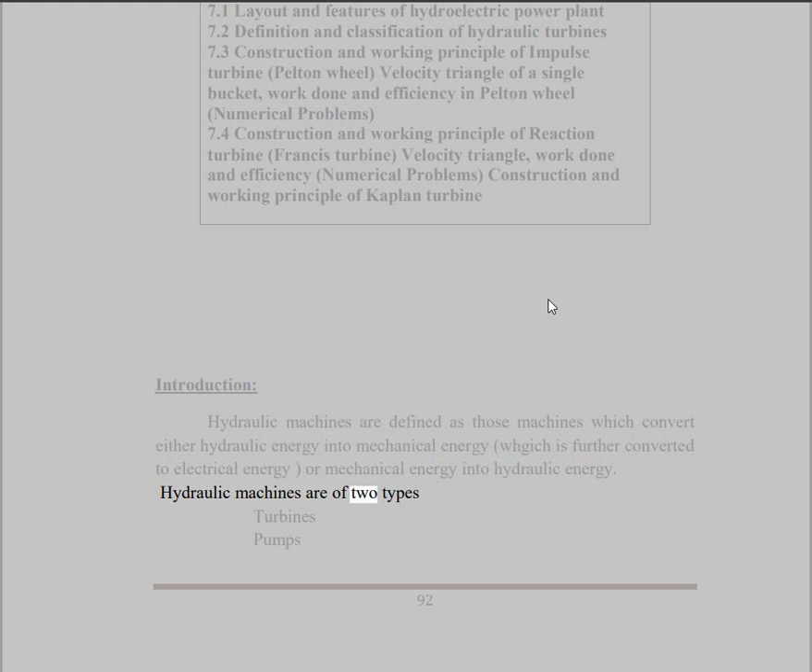Turbines are defined as the hydraulic machines which convert hydraulic energy into mechanical energy. This mechanical energy is used in running an electric generator, which is directly coupled to the shaft of the turbine. Thus mechanical energy is converted into electrical energy. The electrical power, which is obtained from the hydraulic energy, is known as hydroelectric power.

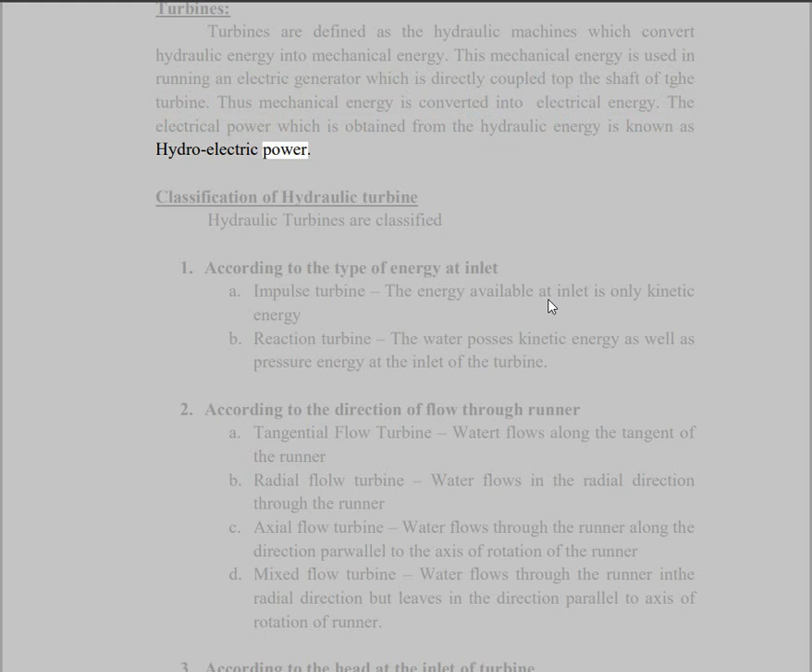Classification of hydraulic turbine. Hydraulic turbines are classified according to the type of energy at inlet: A. Impulse turbine - the energy available at inlet is only kinetic energy. B. Reaction turbine - the water possesses kinetic energy as well as pressure energy at the inlet of the turbine.

According to the direction of flow through runner: A. Tangential flow turbine - water flows along the tangent of the runner. B. Radial flow turbine - water flows in the radial direction through the runner. C. Axial flow turbine - water flows through the runner along the direction parallel to the axis of rotation of the runner. D. Mixed flow turbine - water flows through the runner in the radial direction, but leaves in the direction parallel to the axis of rotation of the runner. According to the head at the inlet of turbine.

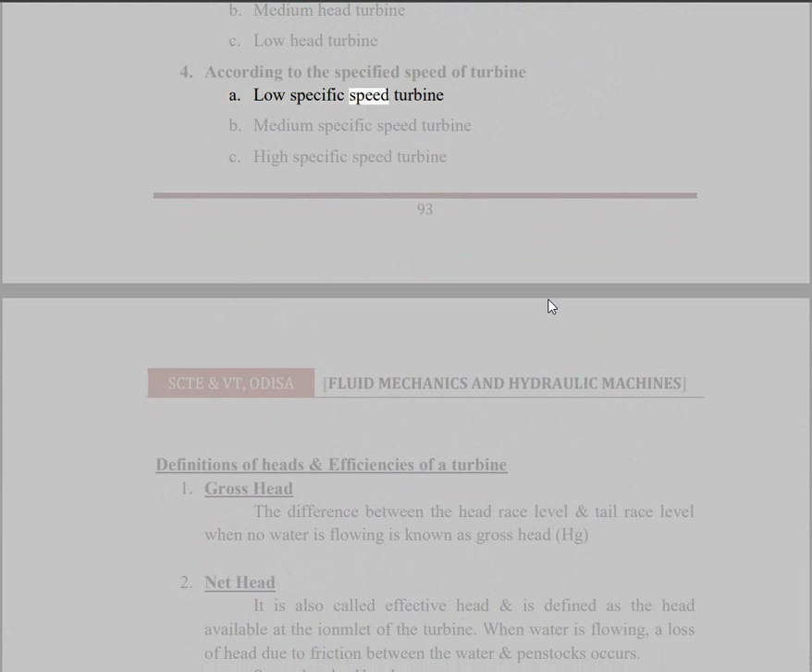A. High head turbine. B. Medium head turbine. C. Low head turbine. According to the specific speed of turbine: A. Low specific speed turbine. B. Medium specific speed turbine. C. High specific speed turbine.

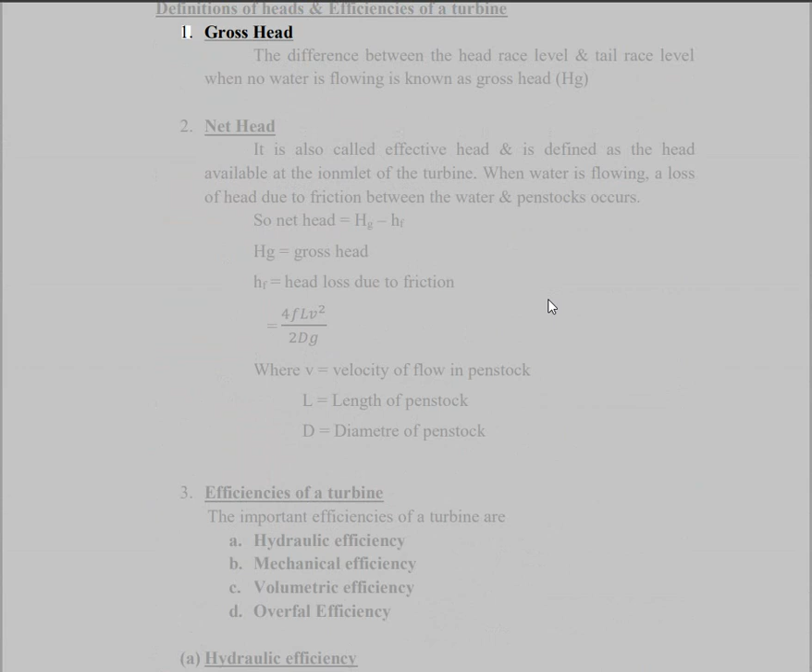Definitions of heads and efficiencies of a turbine. Gross head: the difference between the head race level and tail race level when no water is flowing is known as gross head, Hg.

Net head is also called effective head, and is defined as the head available at the inlet of the turbine. When water is flowing, a loss of head due to friction between the water and penstocks occurs. So net head equals Hg minus Hf, where Hg equals gross head and Hf equals head loss due to friction, with V equals velocity of flow in penstock, L equals length of penstock, D equals diameter of penstock.

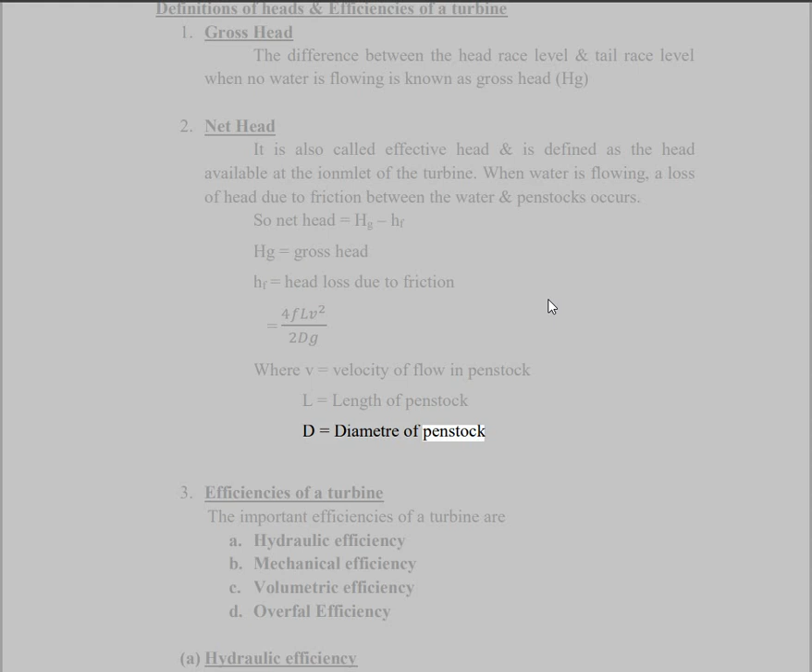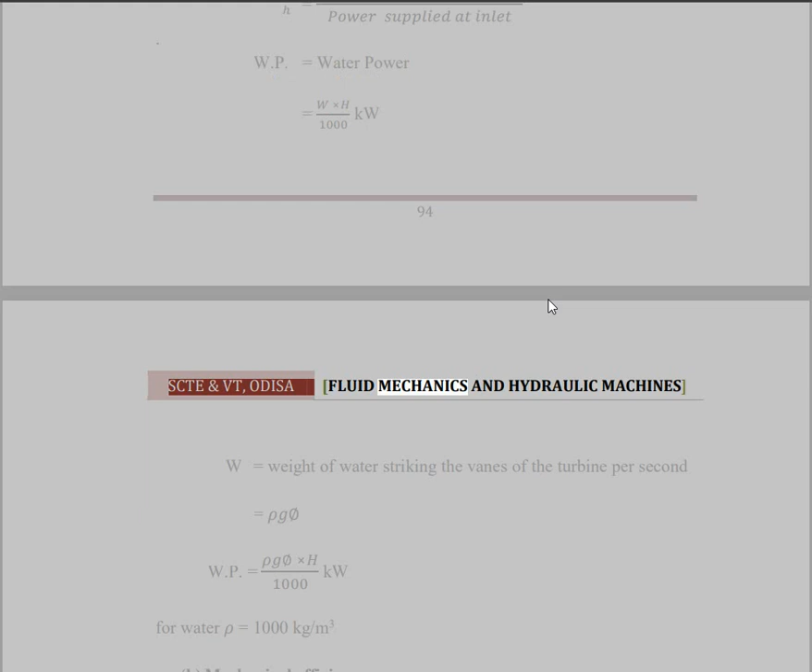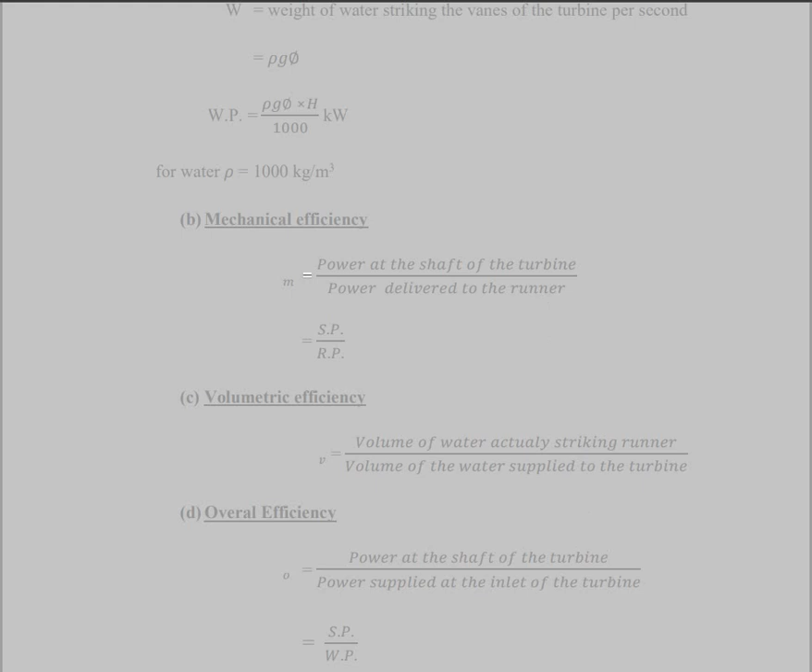The Pelton wheel or Pelton turbine is a tangential flow impulse turbine. The water strikes the runner along the tangent of the runner. The energy available at the inlet of the turbine is only kinetic energy. The pressure at the inlet and outlet of the turbine is atmospheric. This turbine is used for high heads.

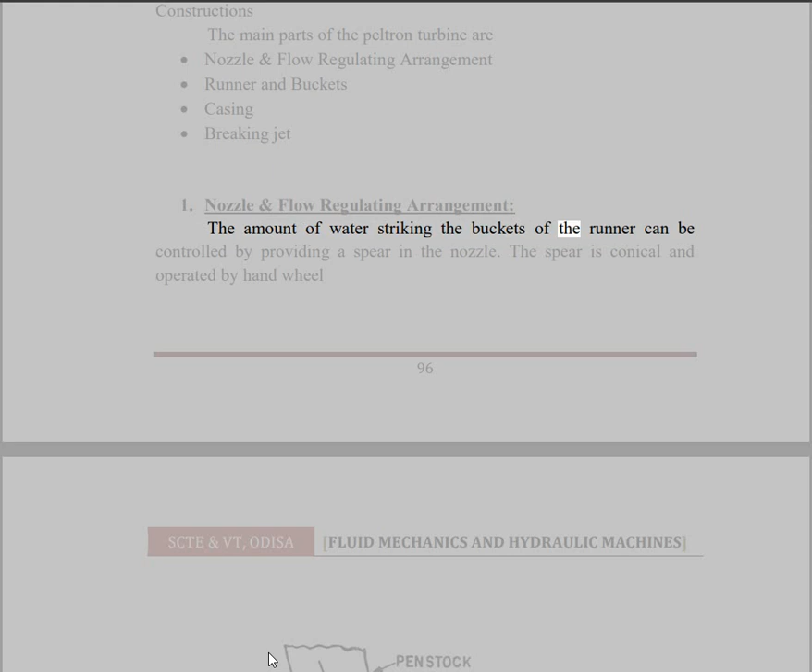Construction. The main parts of the Pelton turbine are: nozzle and flow regulating arrangement, runner and buckets, casing, and braking jet. Nozzle and flow regulating arrangement: the amount of water striking the buckets of the runner can be controlled by providing a spear in the nozzle. The spear is conical and operated by a hand wheel.

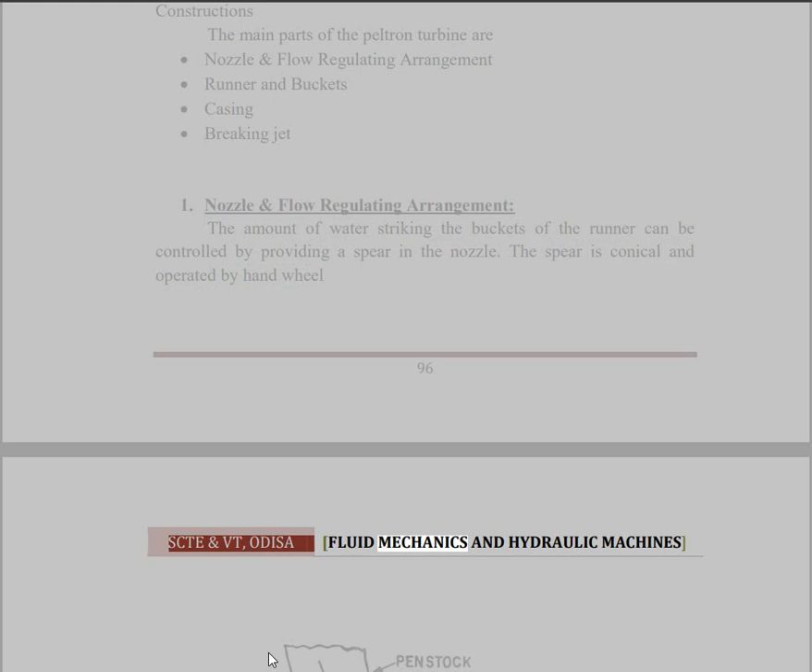When the spear is pushed forward, the amount of water striking is reduced, and when the spear is pushed back, the amount of water striking the runner is increased.

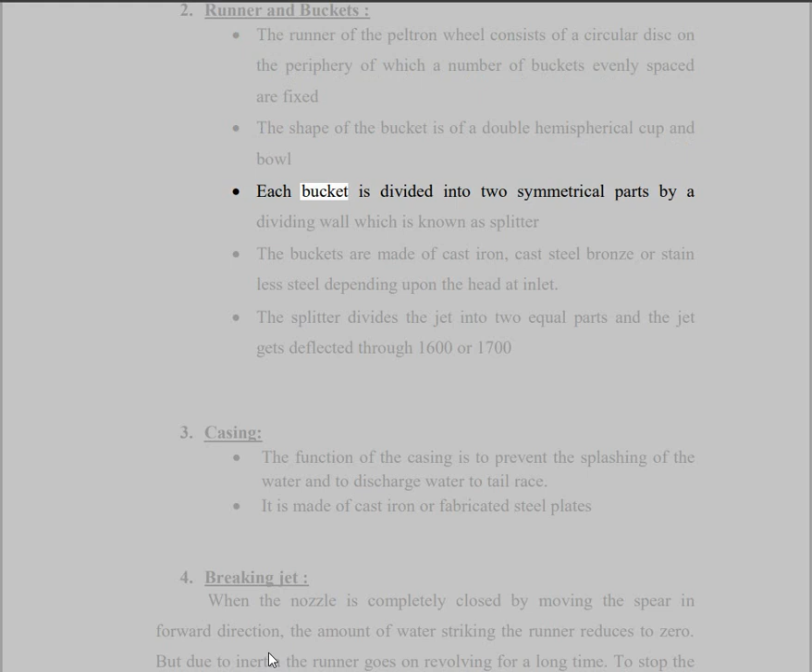Runner and buckets. The runner of the Pelton wheel consists of a circular disc on the periphery of which a number of buckets evenly spaced are fixed. The shape of the bucket is of a double hemispherical cup and bowl. Each bucket is divided into two symmetrical parts by a dividing wall known as a splitter. The buckets are made of cast iron, cast steel, bronze, or stainless steel depending upon the head at inlet. The splitter divides the jet into two equal parts, and the jet gets deflected through 160 or 170 degrees.

Casing. The function of the casing is to prevent the splashing of the water and to discharge water to the tail race. It is made of cast iron or fabricated steel plates.

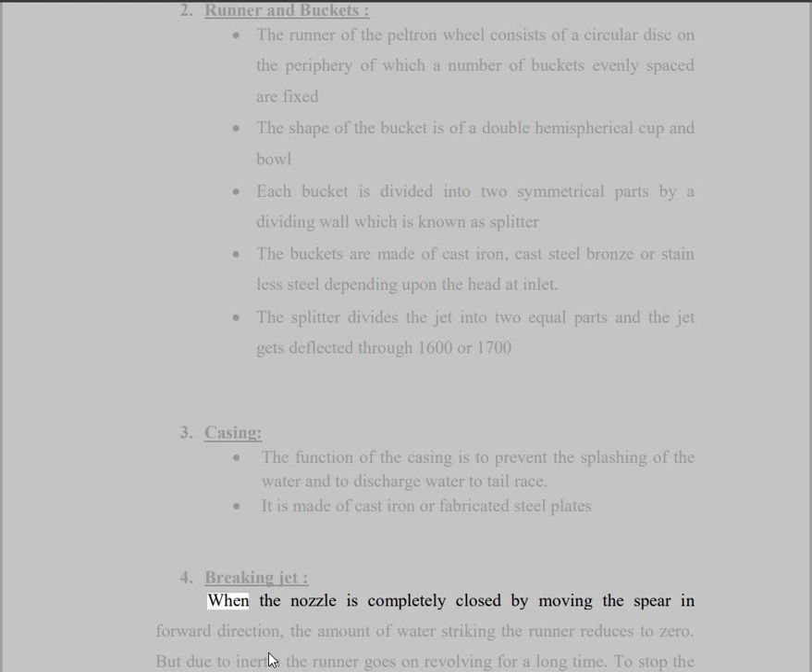Braking jet. When the nozzle is completely closed by moving the spear in the forward direction, the amount of water striking the runner reduces to zero. But due to inertia, the runner goes on revolving for a long time. To stop the runner in short time, a small nozzle is provided which directs the jet of water on the back of the vanes. This jet is called the braking jet.

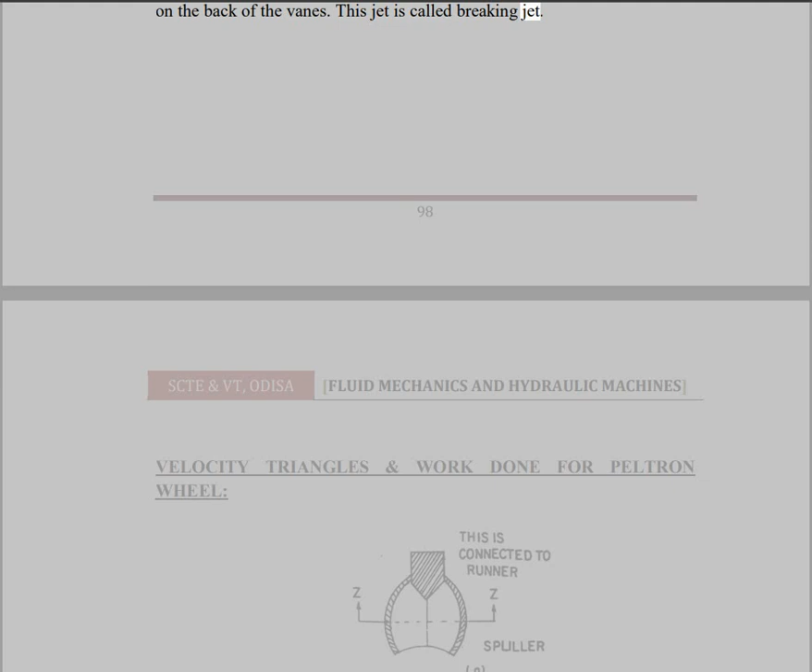Velocity triangles and work done for Pelton wheel. The jet of water strikes the bucket at the splitter.

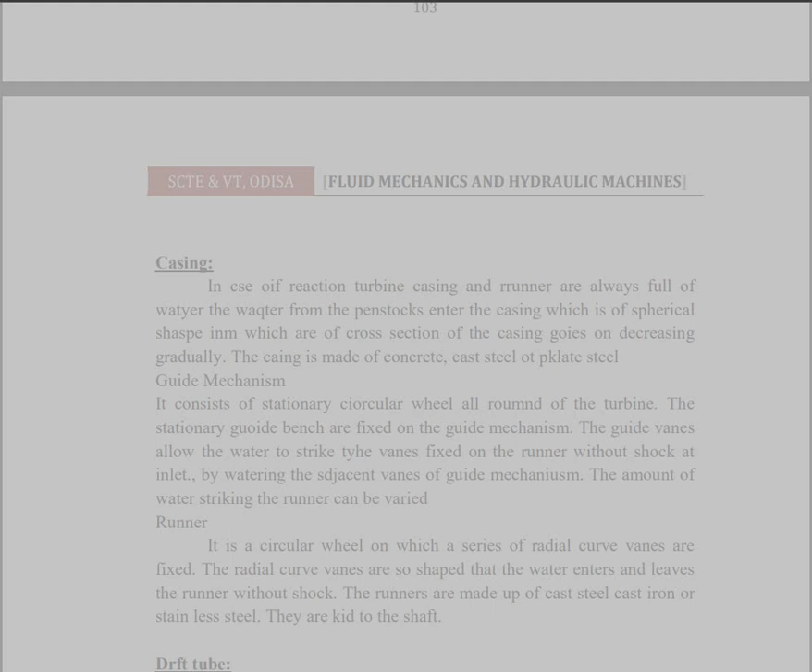Francis Turbine is an inward flow reaction turbine, having radial discharge at outlet. Radial flow reaction turbine: radial flow turbines are those turbines in which the water flows in the radial direction. The water may flow radially from outward to inward or from inward to outward. Reaction turbines means that the water at the inlet of the turbine possesses kinetic energy as well as pressure energy.

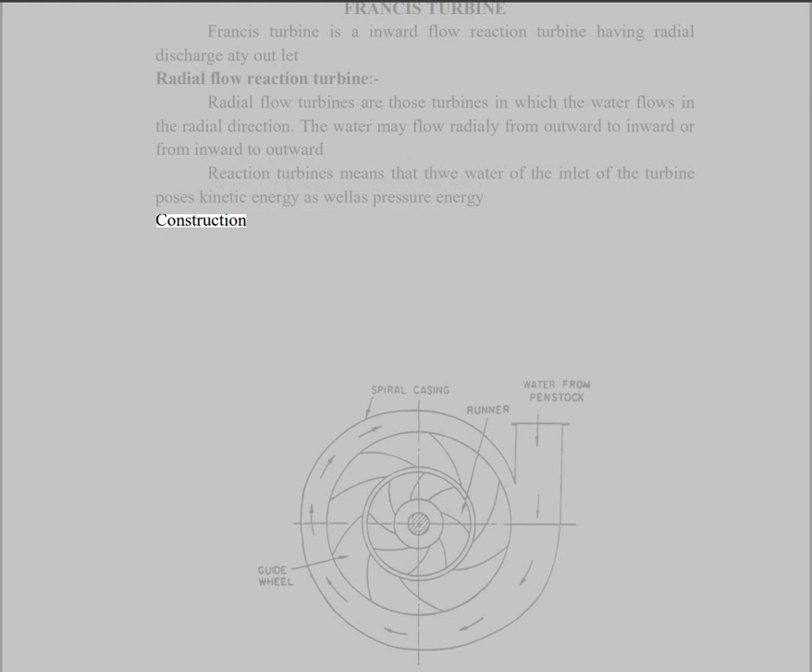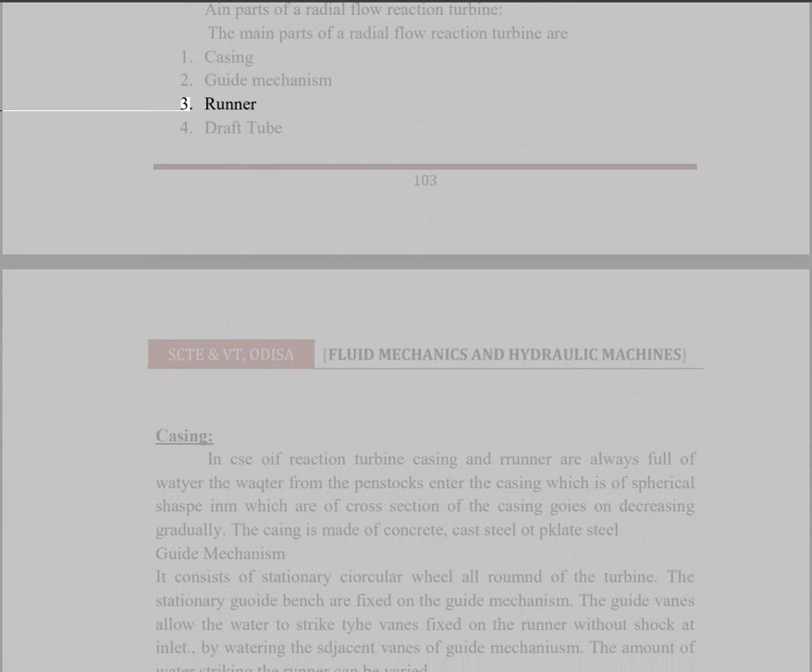Construction and parts of a radial flow reaction turbine. The main parts of a radial flow reaction turbine are: 1. Casing, 2. Guide mechanism, 3. Runner, 4. Draft tube.

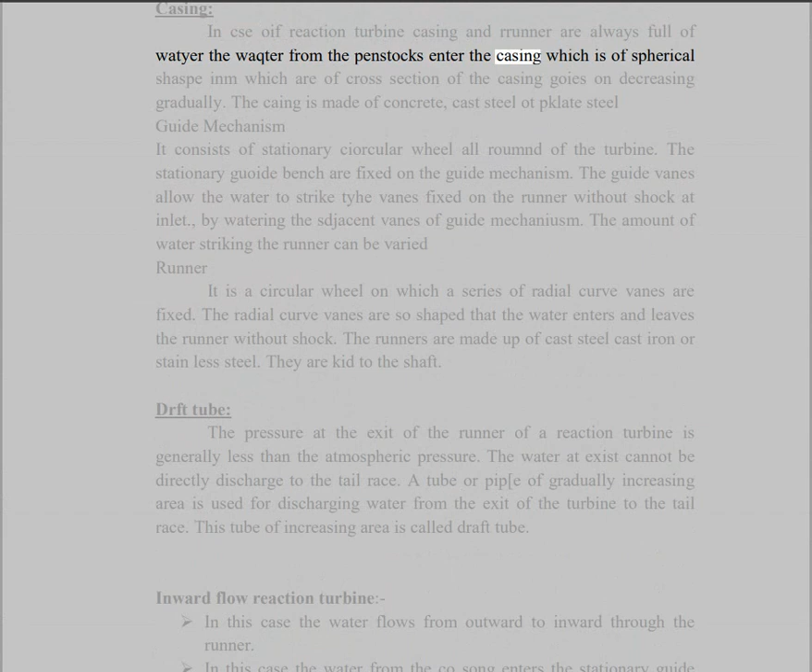Casing. In case of reaction turbine, casing and runner are always full of water. The water from the penstock enters the casing, which is of spiral shape in which the area of cross-section of the casing goes on decreasing gradually. The casing is made of concrete, cast steel, or plate steel.

Guide mechanism. It consists of a stationary circular wheel all around the turbine. The stationary guide vanes are fixed on the guide mechanism. The guide vanes allow the water to strike the vanes fixed on the runner without shock at inlet by varying the adjacent vanes of the guide mechanism. The amount of water striking the runner can be varied.

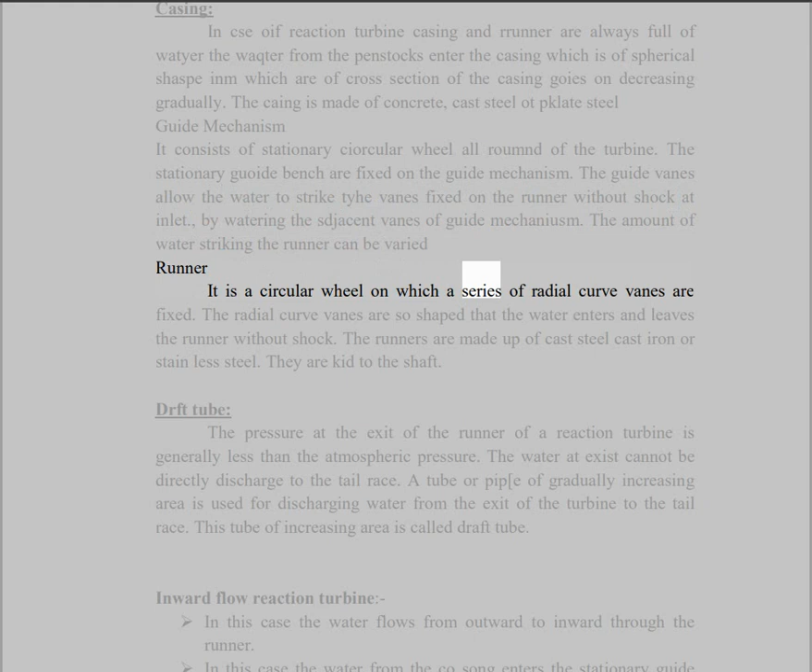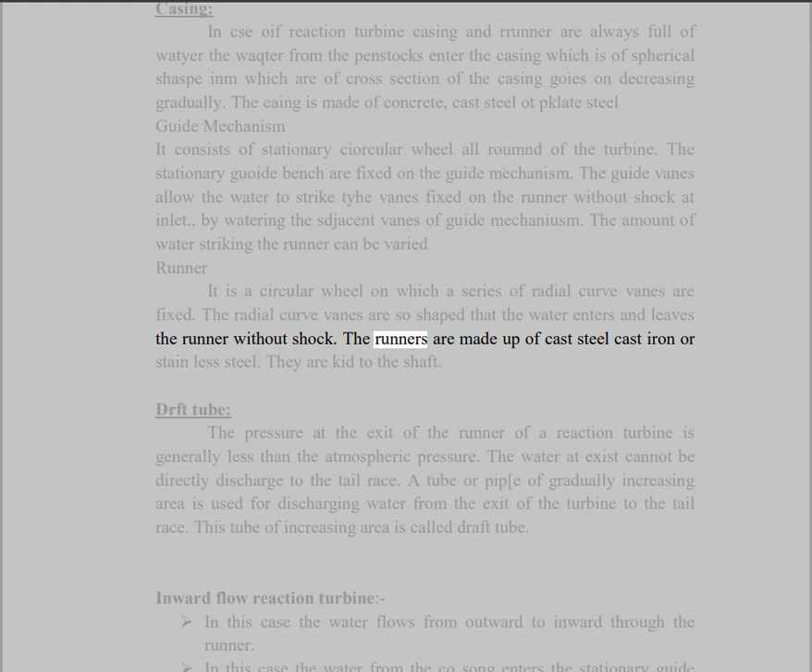Runner. It is a circular wheel on which a series of radial curved vanes are fixed. The radial curved vanes are so shaped that the water enters and leaves the runner without shock. The runners are made up of cast steel, cast iron, or stainless steel. They are keyed to the shaft.

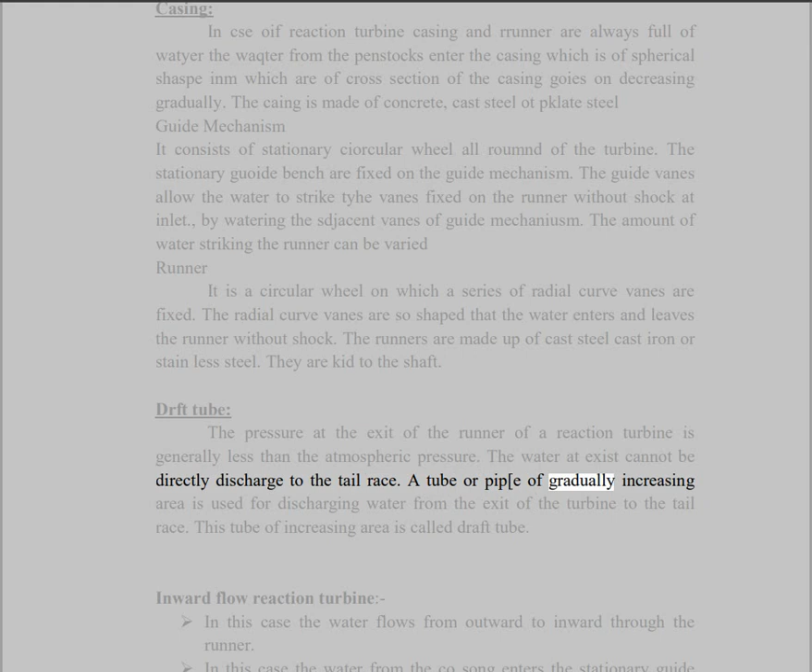Draft tube. The pressure at the exit of the runner of a reaction turbine is generally less than the atmospheric pressure. The water at exit cannot be directly discharged to the tail race. A tube or pipe of gradually increasing area is used for discharging water from the exit of the turbine to the tail race. This tube of increasing area is called the draft tube.

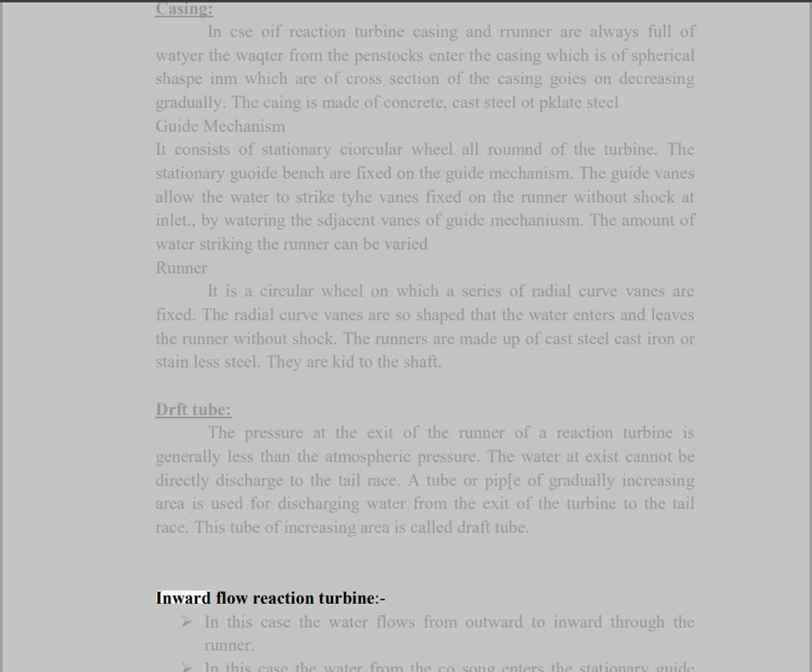Inward flow reaction turbine. In this case, the water flows from outward to inward through the runner. The water from the casing enters the stationary guide wheel. The guide wheel consists of guide vanes which direct the water to enter the runner, which consists of moving vanes.

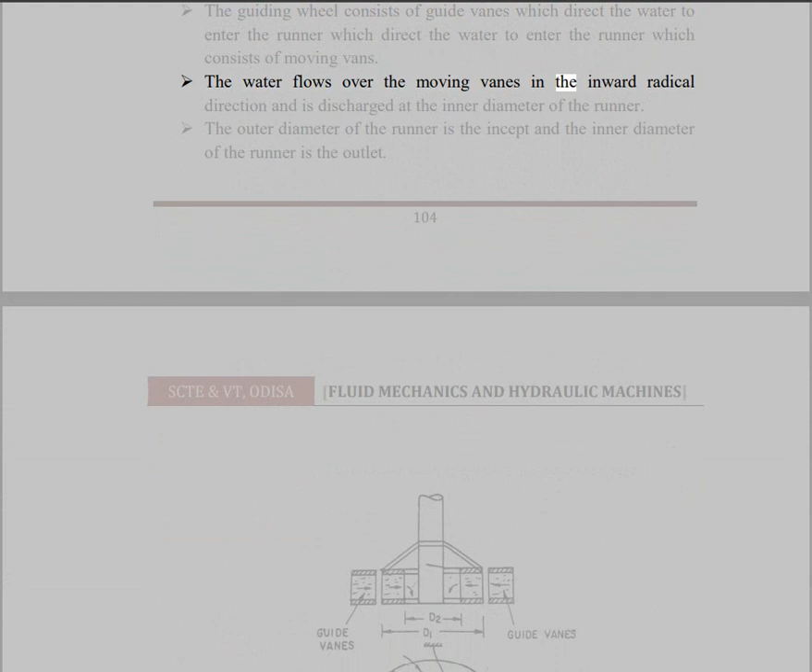The water flows over the moving vanes in the inward radial direction and is discharged at the inner diameter of the runner. The outer diameter of the runner is the inlet, and the inner diameter of the runner is the outlet.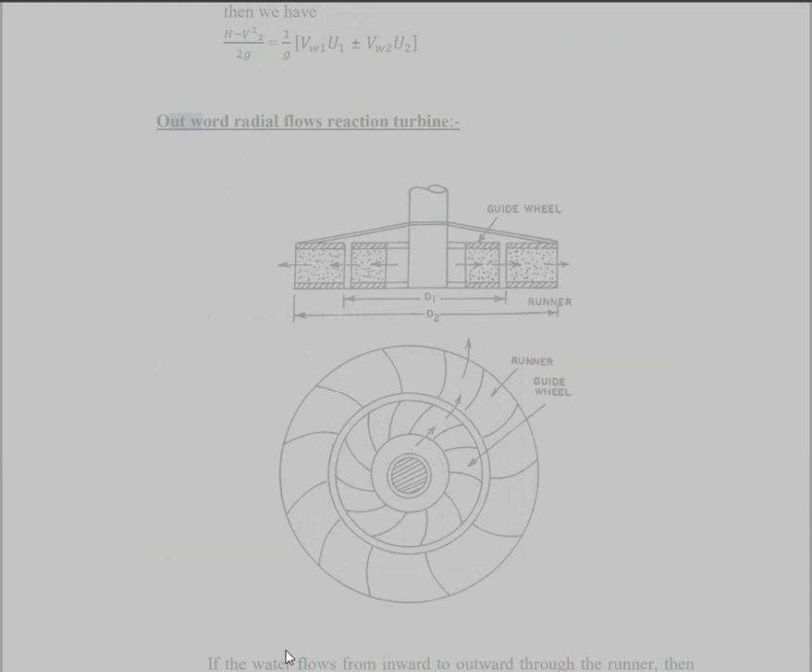If the water flows from inward to outward through the runner, then that turbine is known as outward flow reaction turbine. In this case, the inlet of the runner is at the inner diameter of the runner, so the tangential velocity at inlet will be less than that at outlet. With U1, U2 as D1, D2, the velocity triangles at inlet and outlet, the work done by water on the runner per second, the horsepower developed, and the hydraulic efficiency are similar to the inward flow reaction turbine.

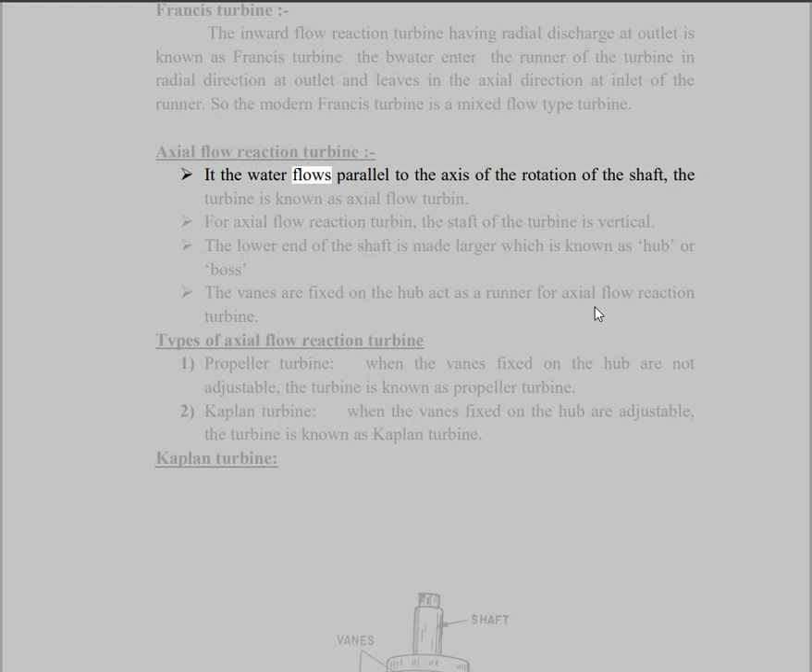Axial flow reaction turbine. If the water flows parallel to the axis of rotation of the shaft, the turbine is known as axial flow turbine. For axial flow reaction turbine, the shaft of the turbine is vertical. The lower end of the shaft is made larger, which is known as hub or boss. The vanes are fixed on the hub and act as a runner for axial flow reaction turbine.

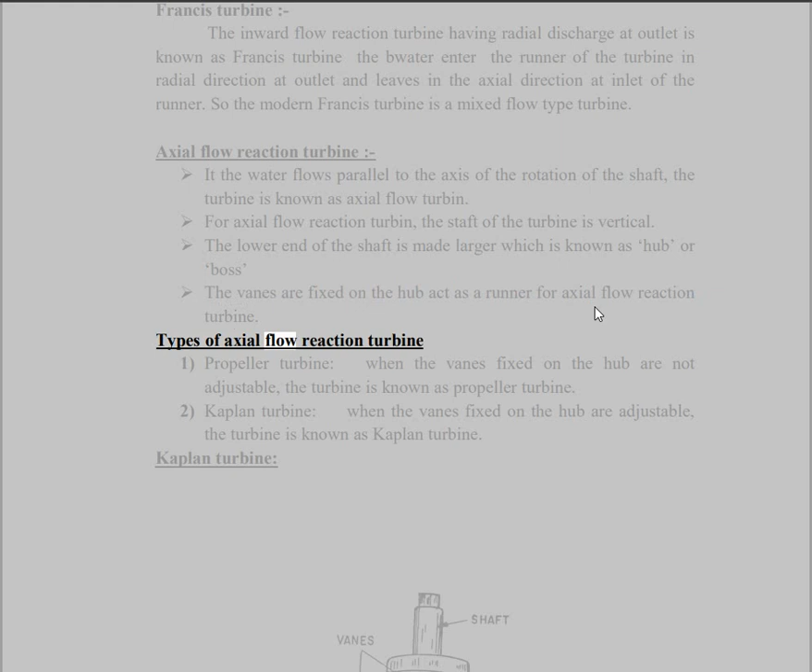Types of axial flow reaction turbine: 1. Propeller turbine - when the vanes fixed on the hub are not adjustable, the turbine is known as propeller turbine. 2. Kaplan turbine - when the vanes fixed on the hub are adjustable, the turbine is known as Kaplan turbine.

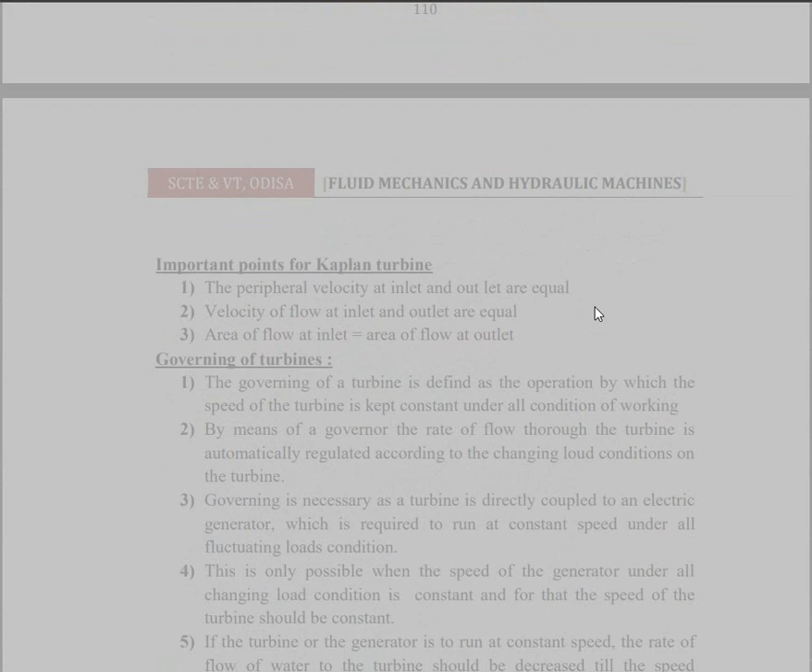When the vanes fixed on the hub are adjustable, the turbine is known as a Kaplan turbine. This turbine is suitable where a larger quantity of water is available at low head. The Kaplan turbine consists of a hub fixed to the shaft, on which the adjustable vanes are fixed.

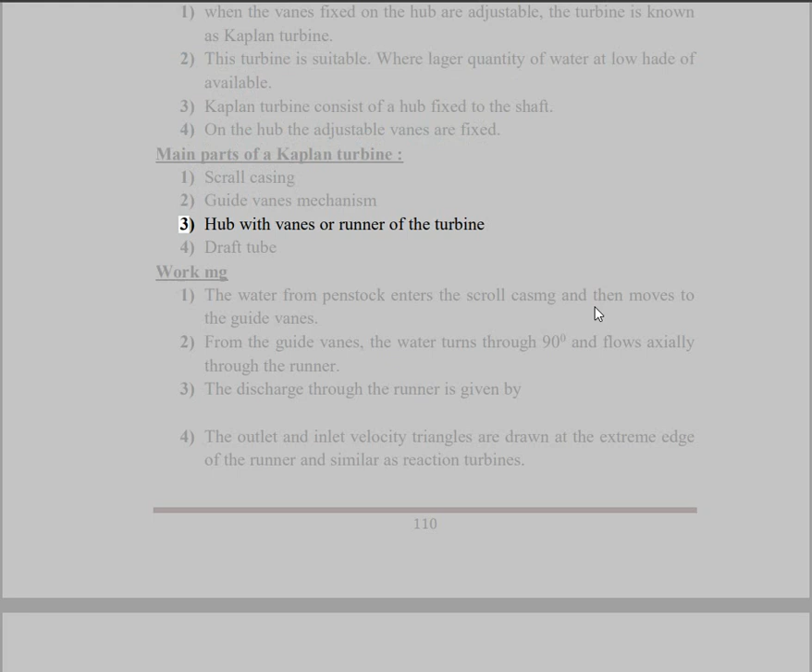Main parts of a Kaplan turbine: 1. Scroll casing. 2. Guide vanes mechanism. 3. Hub with vanes, or runner of the turbine. 4. Draft tube.

The water from the penstock enters the scroll casing and then moves to the guide vanes. From the guide vanes, the water turns through 90 degrees and flows axially through the runner. The discharge through the runner is given by a formula. The outlet and inlet velocity triangles are drawn at the extreme edge of the runner, similar to reaction turbines.

Important points for Kaplan turbine: 1. The peripheral velocity at inlet and outlet are equal. 2. Velocity of flow at inlet and outlet are equal. 3. Area of flow at inlet equals area of flow at outlet.

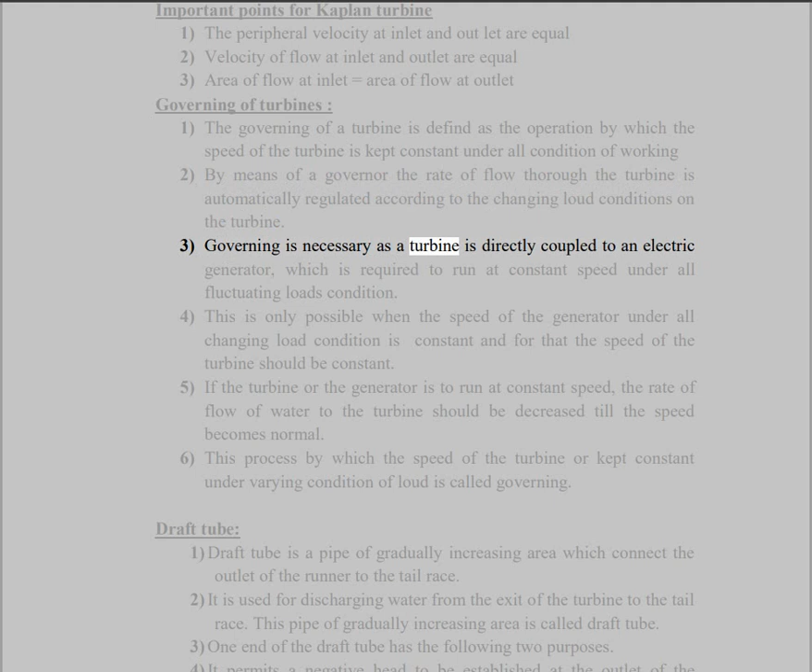Governing of turbines: The governing of a turbine is defined as the operation by which the speed of the turbine is kept constant under all conditions of working. By means of a governor, the rate of flow through the turbine is automatically regulated according to the changing load conditions on the turbine. Governing is necessary as a turbine is directly coupled to an electric generator, which is required to run at constant speed under all fluctuating load conditions. This is only possible when the speed of the generator under all changing load conditions is constant, and for that the speed of the turbine should be constant.

If the turbine or the generator is to run at constant speed, the rate of flow of water to the turbine should be decreased till the speed becomes normal. This process, by which the speed of the turbine is kept constant under varying conditions of load, is called governing.

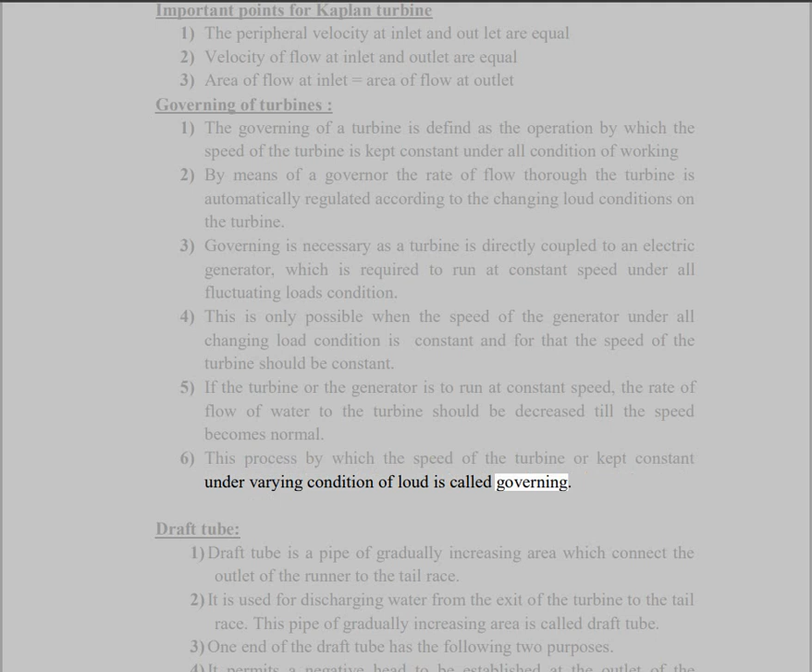Draft tube: The draft tube is a pipe of gradually increasing area which connects the outlet of the runner to the tail race. It is used for discharging water from the exit of the turbine to the tail race. This pipe of gradually increasing area is called the draft tube.

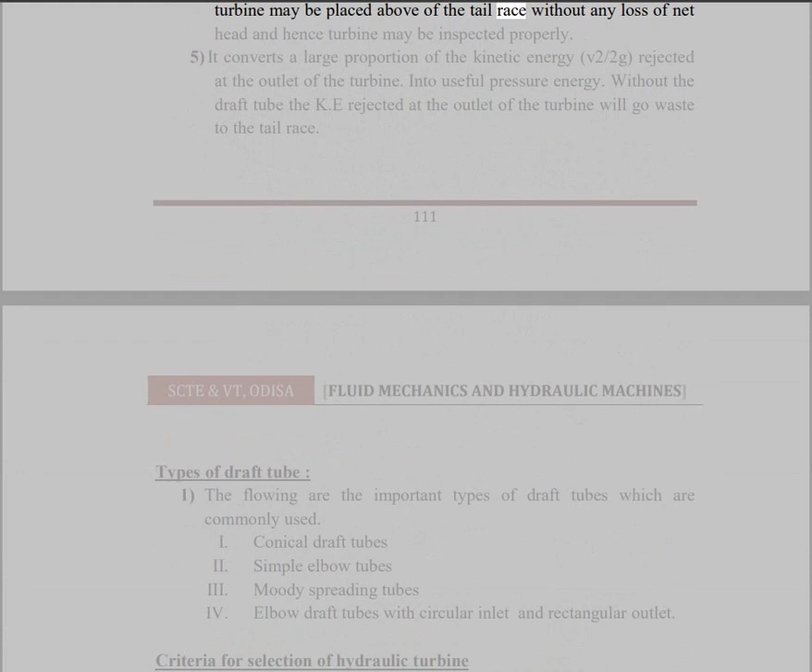One end of the draft tube serves two purposes. It permits a negative head to be established at the outlet of the runner, thereby increasing the net head on the turbine. The turbine may be placed above the tail race without any loss of net head, and hence the turbine may be inspected properly.

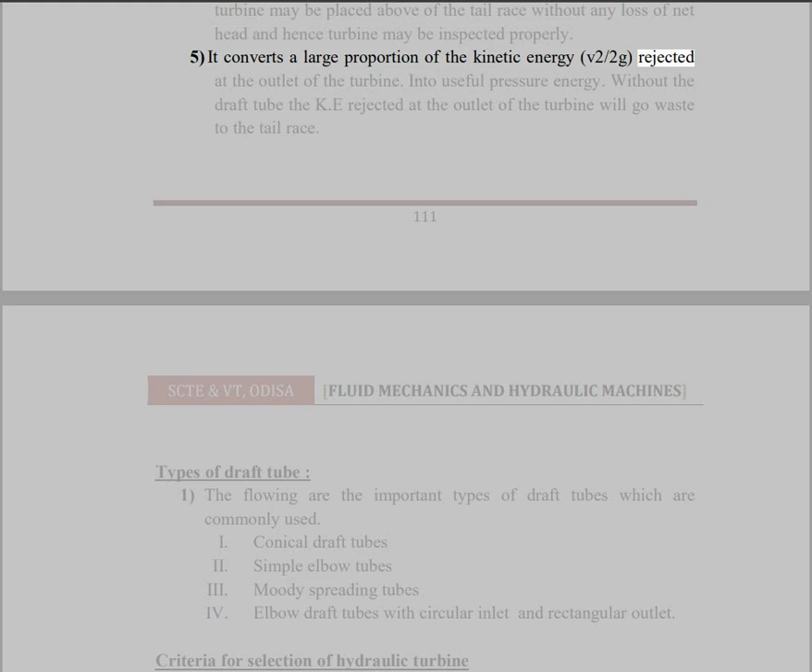It converts a large proportion of the kinetic energy, V squared over 2G, rejected at the outlet of the turbine, into useful pressure energy. Without the draft tube, the kinetic energy rejected at the outlet of the turbine would go waste to the tail race.

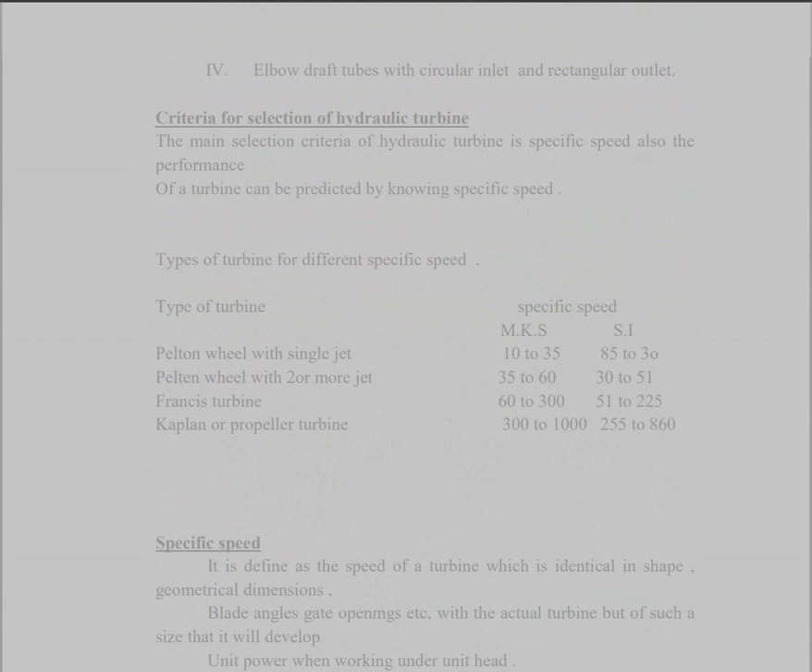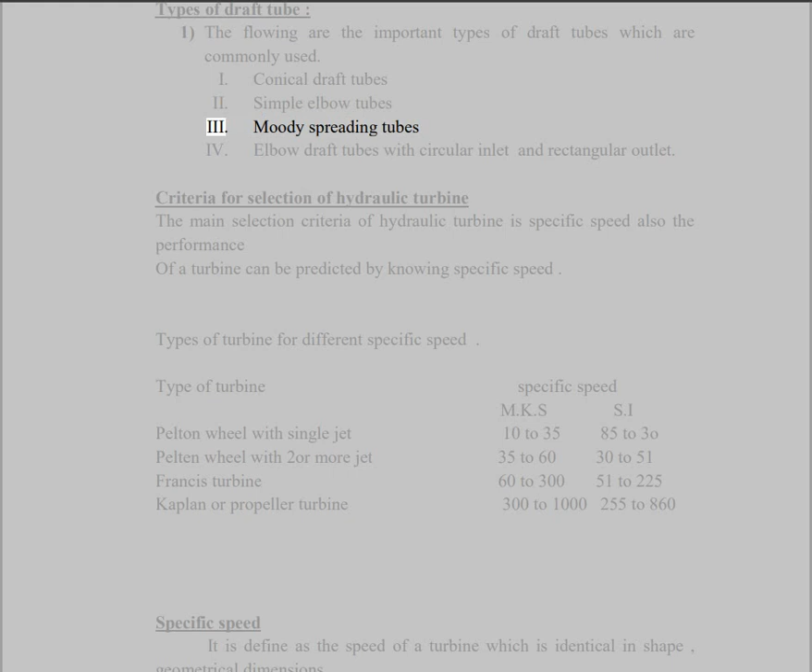Types of draft tube: The following are the important types of draft tubes which are commonly used: 1. Conical draft tubes. 2. Simple elbow tubes. 3. Moody spreading tubes. 4. Elbow draft tubes with circular inlet and rectangular outlet.

Criteria for selection of hydraulic turbine: The main selection criteria of hydraulic turbine is specific speed. Also, the performance of a turbine can be predicted by knowing specific speed.

Types of turbine for different specific speeds: Pelton wheel with single jet, 10 to 35 specific speed. Pelton wheel with 2 or more jets, 35 to 60. Francis turbine, 60 to 300. Kaplan or propeller turbine, 300 to 1000.

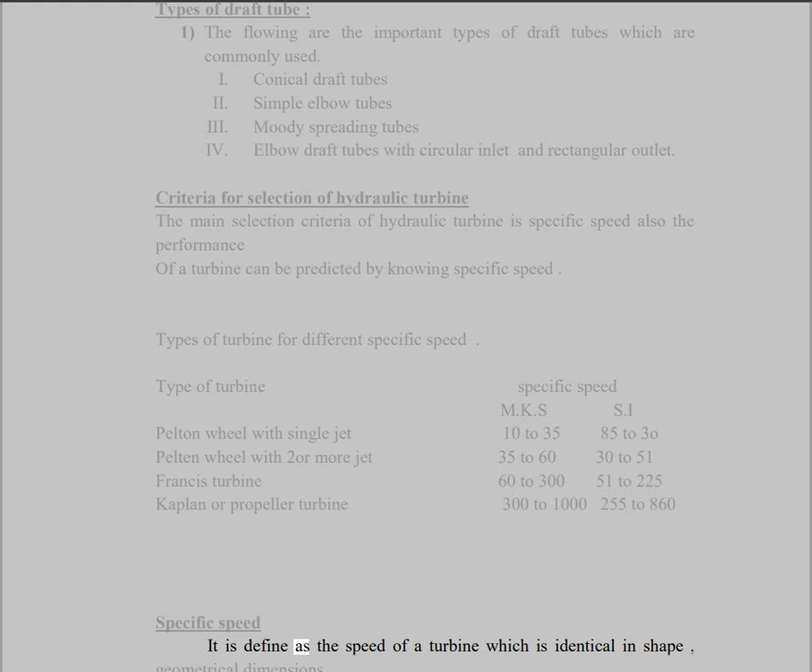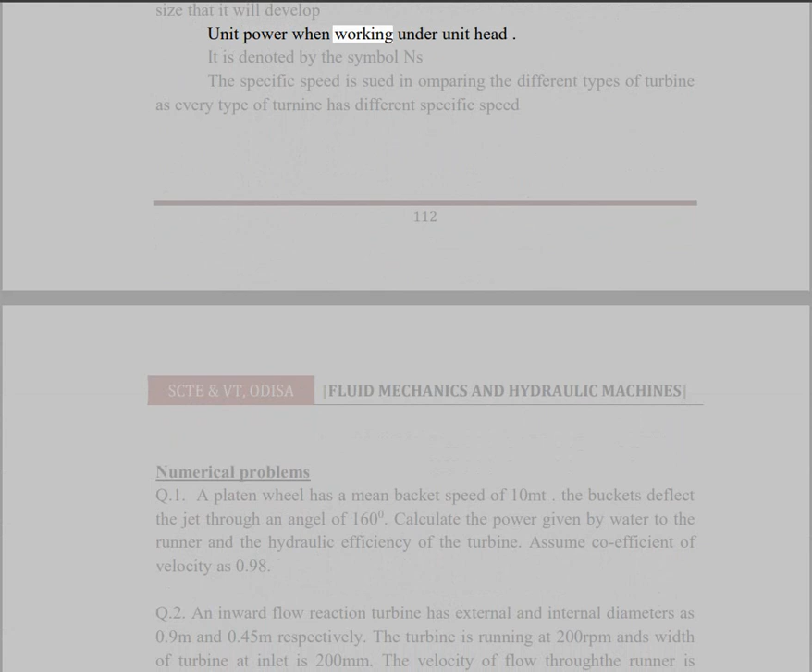Specific speed is defined as the speed of a turbine which is identical in shape, geometrical dimensions, blade angles, gate openings, etc., with the actual turbine, but of such a size that it will develop unit power when working under unit head. It is denoted by the symbol NS. The specific speed is used in comparing different types of turbines, as every type of turbine has a different specific speed.

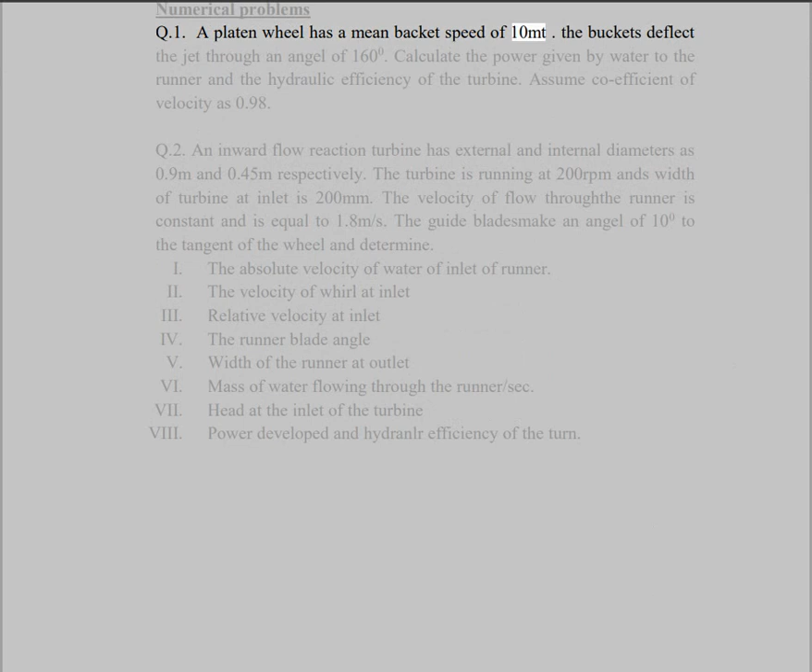Definition and classification of pumps. Centrifugal pumps: construction and working principles, velocity diagram of a single impeller, work done, and efficiency. Numerical problems. Concept of multistage centrifugal pumps. Cavitation: causes and its effects. Reciprocating pumps: construction and working principle of single-acting and double-acting reciprocating pumps. Concept of slip and negative slip.

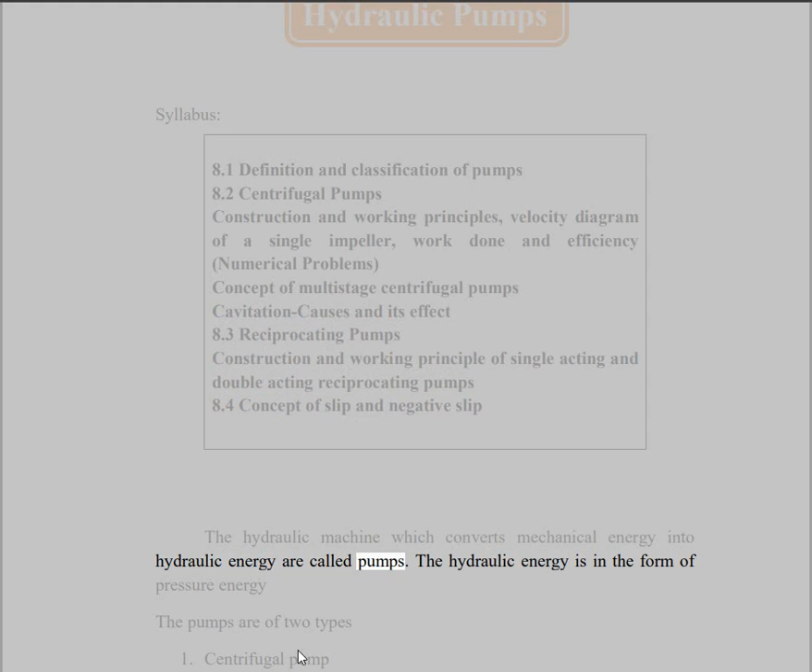The hydraulic machine which converts mechanical energy into hydraulic energy is called a pump. The hydraulic energy is in the form of pressure energy. Pumps are of two types: 1. Centrifugal pump. 2. Reciprocating pump.

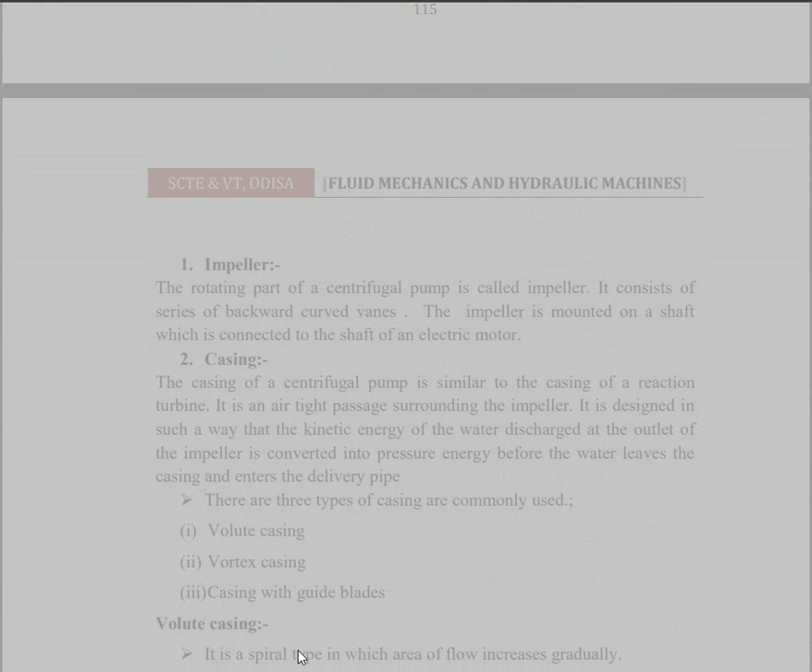Centrifugal pump: the hydraulic machine which converts mechanical energy into pressure energy by means of centrifugal force acting on the fluid is known as a centrifugal pump. The centrifugal pump acts as the reverse of an inward radial flow reaction turbine.

The centrifugal pump works on the principle of forced vortex flow, which means that when a certain mass of liquid is rotated by an external torque, a rise in pressure head of the rotating liquid takes place. The rise in pressure head at any point is proportional to the square of the tangential velocity of the liquid at that point, i.e. V^2/2g or W^2R^2/2g.

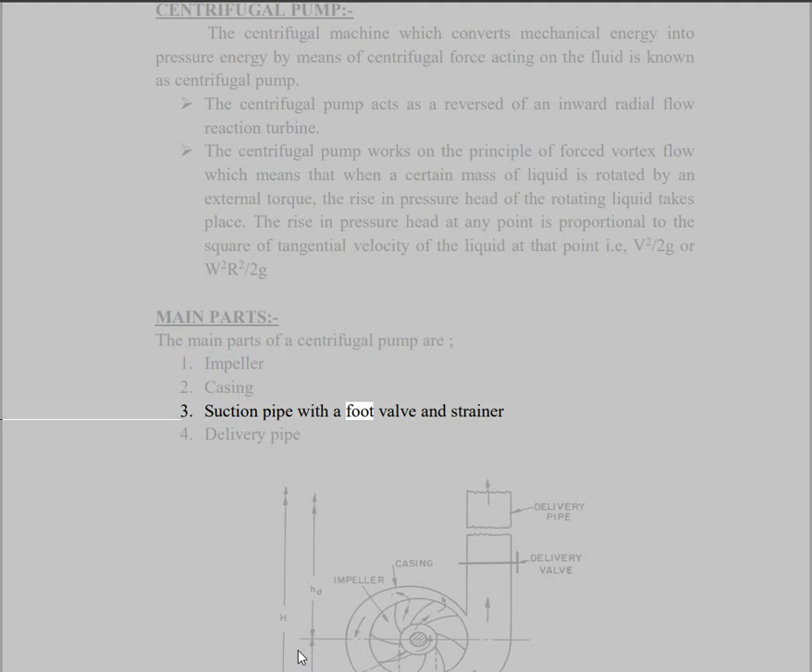Main parts. The main parts of a centrifugal pump are: 1. Impeller. 2. Casing. 3. Suction pipe with a foot valve and strainer. 4. Delivery pipe.

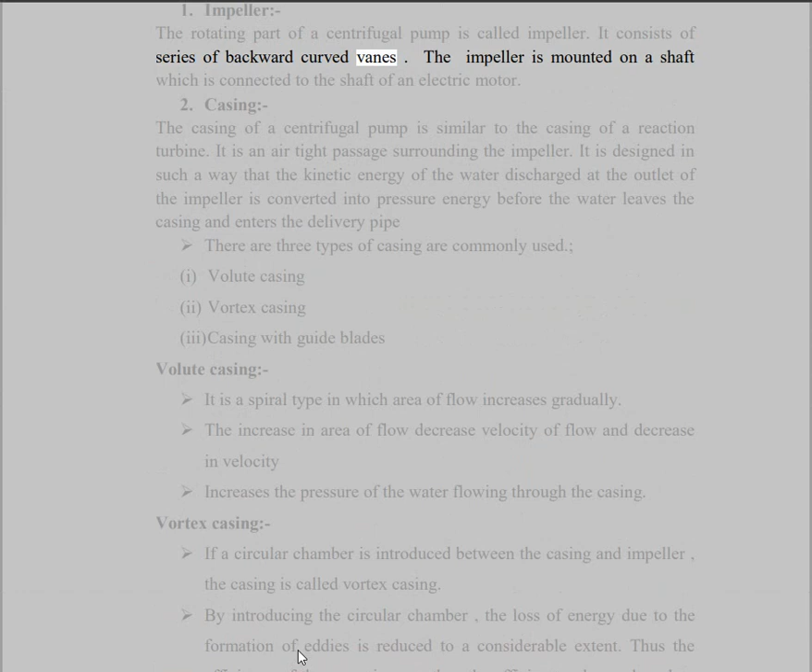1. Impeller. The rotating part of a centrifugal pump is called the impeller. It consists of a series of backward curved vanes. The impeller is mounted on a shaft which is connected to the shaft of an electric motor.

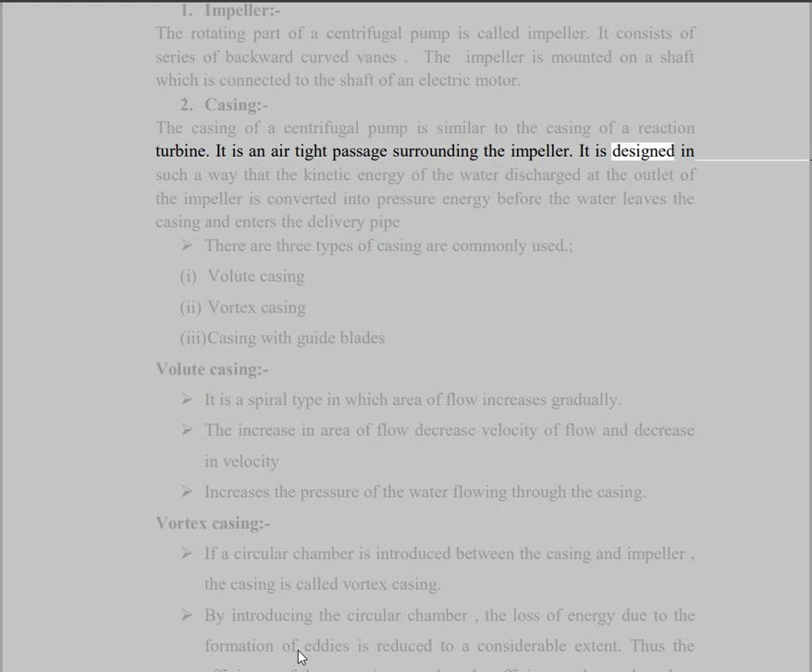2. Casing. The casing of a centrifugal pump is similar to the casing of a reaction turbine. It is an airtight passage surrounding the impeller. It is designed in such a way that the kinetic energy of the water discharged at the outlet of the impeller is converted into pressure energy before the water leaves the casing and enters the delivery pipe. There are 3 types of casing commonly used: 1. Volute casing. 2. Vortex casing. 3. Casing with guide blades.

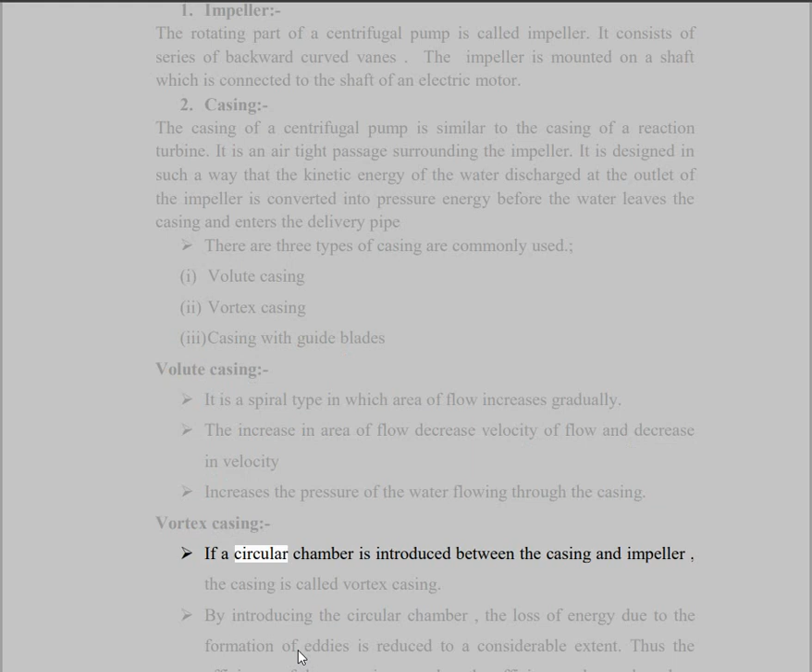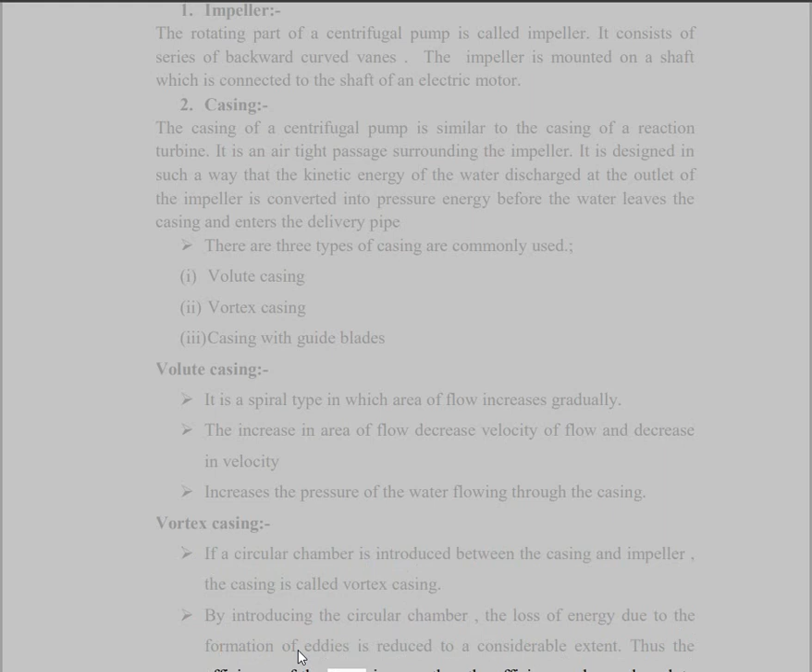Volute casing is a spiral type in which the area of flow increases gradually. The increase in area of flow decreases the velocity of flow, and the decrease in velocity increases the pressure of the water flowing through the casing. Vortex casing: if a circular chamber is introduced between the casing and impeller, the casing is called vortex casing. By introducing the circular chamber, the loss of energy due to the formation of eddies is reduced to a considerable extent. Thus the efficiency of the pump is more than when only volute casing is provided.

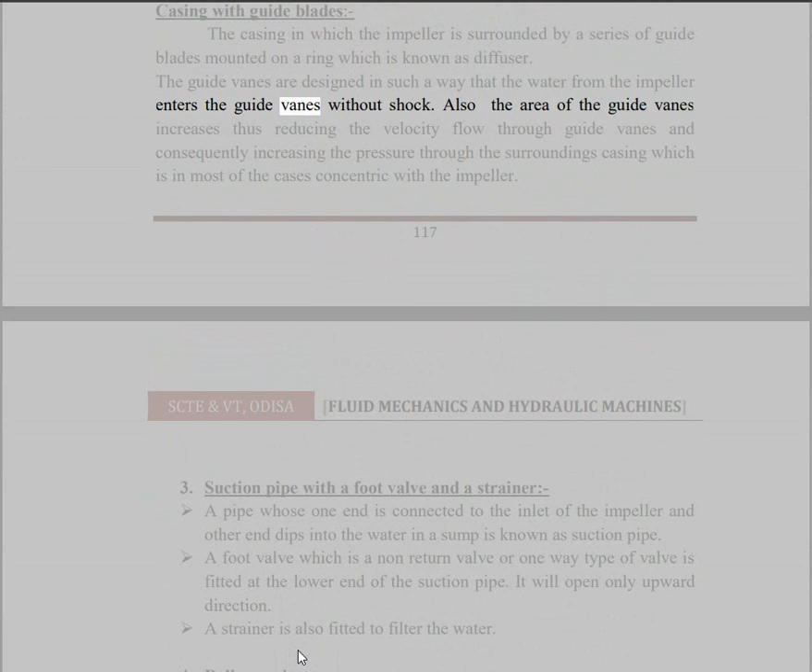Casing with guide blades: the casing in which the impeller is surrounded by a series of guide blades mounted on a ring is known as a diffuser. The guide vanes are designed such that water from the impeller enters the guide vanes without shock. Also, the area of the guide vanes increases, reducing the velocity of flow through the guide vanes and consequently increasing the pressure through the surrounding casing, which in most cases is concentric with the impeller.

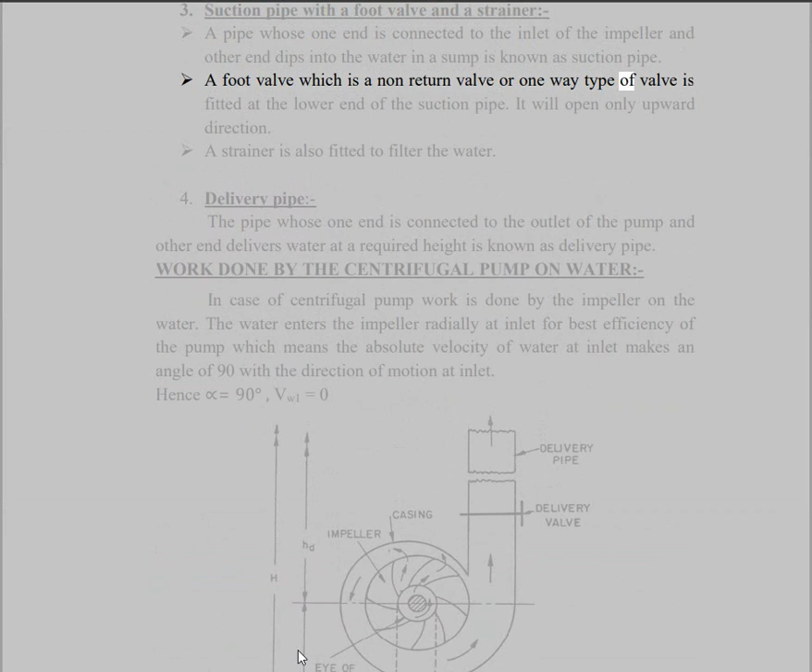3. Suction pipe with a foot valve and a strainer: a pipe whose one end is connected to the inlet of the impeller and the other end dips into the water in a sump is known as the suction pipe. A foot valve, which is a non-return or one-way type valve, is fitted at the lower end of the suction pipe and opens only in the upward direction. A strainer is also fitted to filter the water.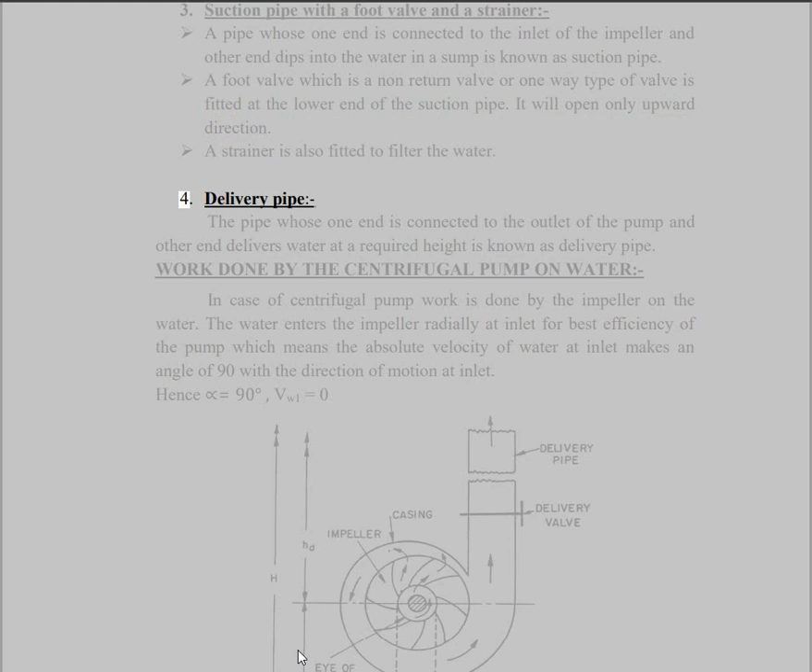4. Delivery pipe: the pipe whose one end is connected to the outlet of the pump and the other end delivers water at the required height is known as the delivery pipe.

Work done by the centrifugal pump on water: in case of a centrifugal pump, work is done by the impeller on the water. The water enters the impeller radially at inlet for best efficiency of the pump, which means the absolute velocity of water at inlet makes an angle of 90 degrees with the direction of motion at inlet. Hence, alpha equals 90 degrees, and Vw1 equals 0.

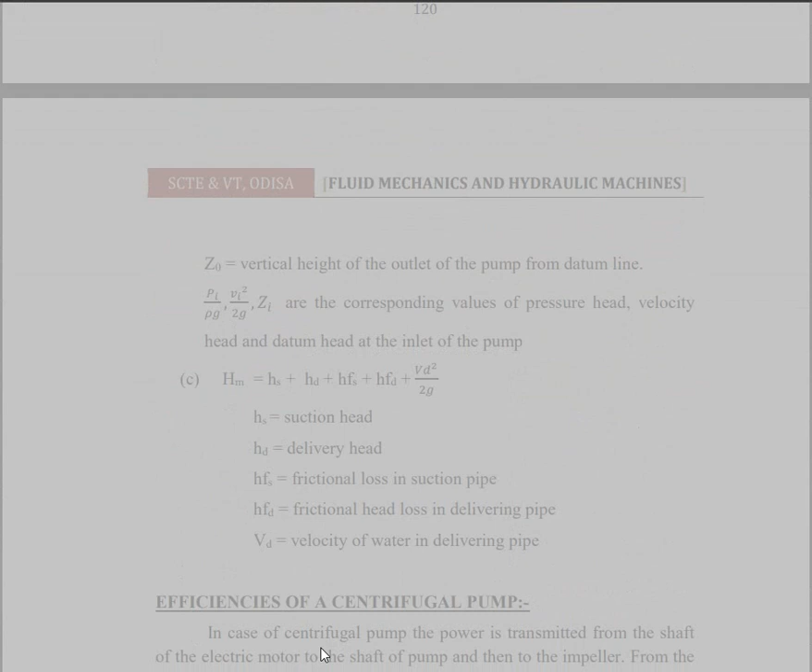Definitions of heads and efficiencies of a centrifugal pump.

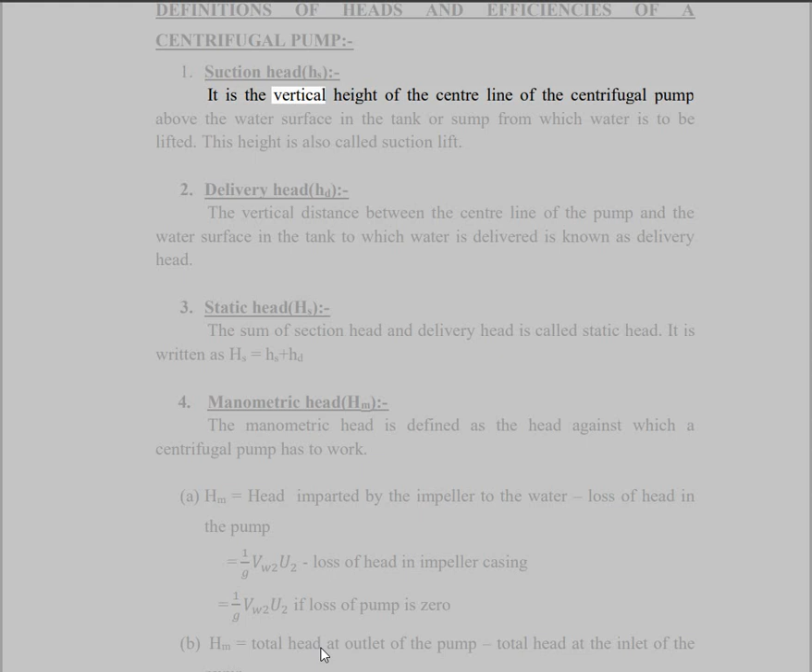Suction head, HS: it is the vertical height of the center line of the centrifugal pump above the water surface in the tank or sump from which water is to be lifted. This height is also called suction lift.

Delivery head, HD: the vertical distance between the center line of the pump and the water surface in the tank to which water is delivered is known as delivery head.

Static head: the sum of suction head and delivery head is called static head. It is written as Hstatic equals Hs plus HD.

Manometric head is defined as the head against which a centrifugal pump has to work. It equals the head imparted by the impeller to the water minus the loss of head in the pump.

If a centrifugal pump consists of two or more impellers, the pump is called a multistage centrifugal pump. The impellers may be mounted on the same shaft or on different shafts.

A multi-stage pump has two functions: first, to produce a high head; second, to discharge a large quantity of liquid. If a high head is to be developed, the impellers are connected in series, while for discharging a large quantity of liquid, the impellers are connected in parallel.

Multi-stage centrifugal pump for high heads: for developing a high head, a number of impellers are mounted in series on the same shaft. The water from the suction pipe enters the first impeller at inlet, and it discharges at outlet with increased pressure.

The water with increased pressure from the outlet of the first impeller is taken to the inlet of the second impeller with the help of a connecting pipe. At the outlet of the second impeller, the pressure of water will be more than the pressure of water at the outlet of the first impeller. Thus, if more impellers are mounted on the same shaft, the pressure will be increased further.

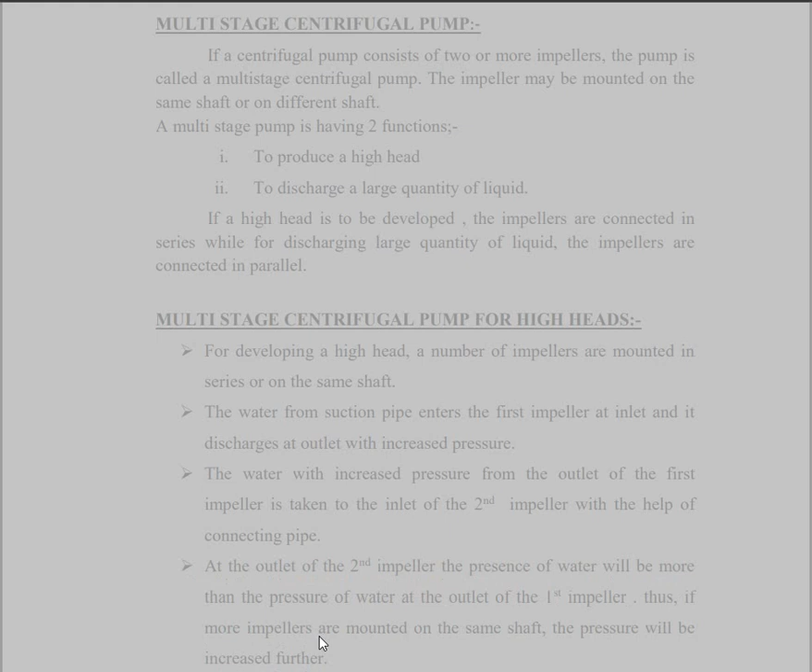Let N equal the number of impellers mounted on the same shaft, and let the head developed by each impeller be given. Then the total head developed equals N times that head.

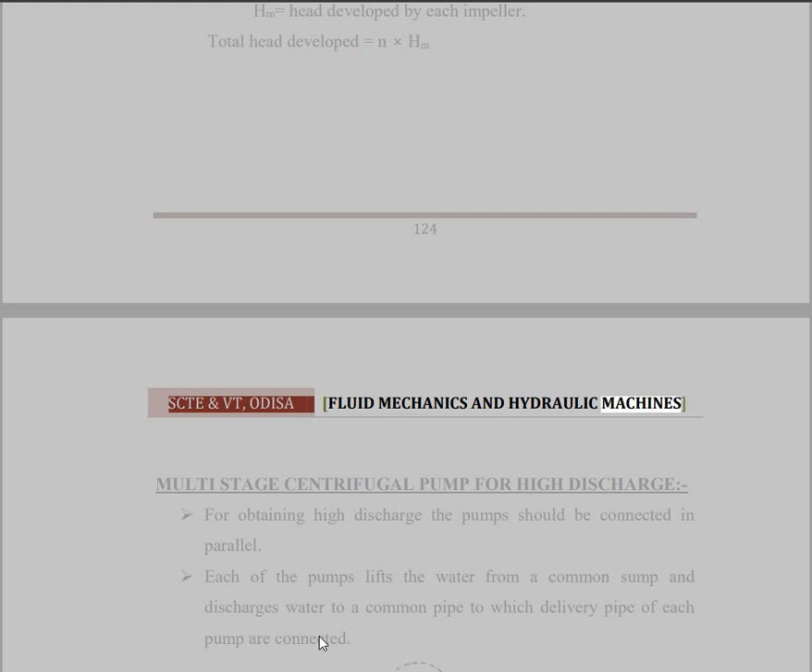Multi-stage centrifugal pump for high discharge: for obtaining high discharge, the pumps should be connected in parallel. Each of the pumps lifts the water from a common sump and discharges water to a common pipe, to which the delivery pipe of each pump is connected.

Each pump is working against the same head. Let N equal the number of identical pumps in parallel, and Q equal the discharge through each pump. The total discharge equals N times Q.

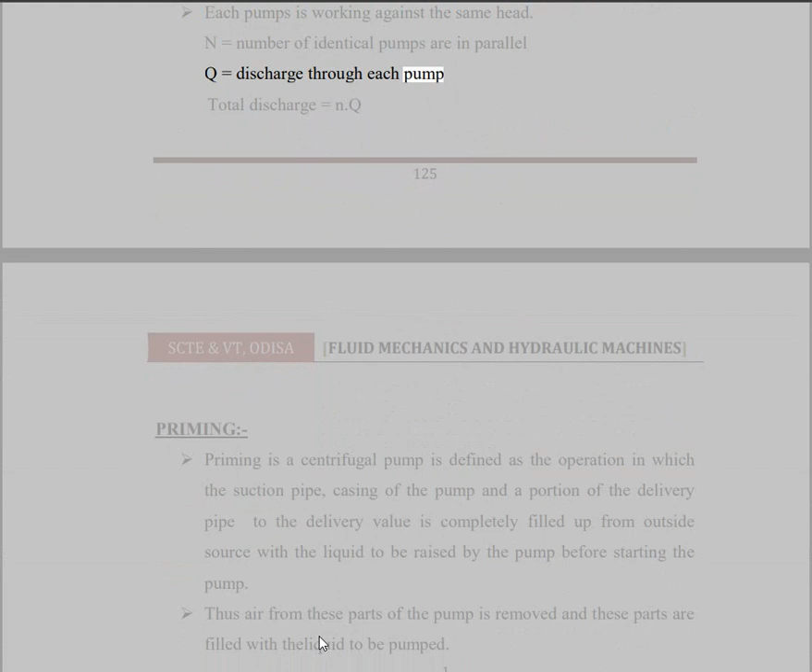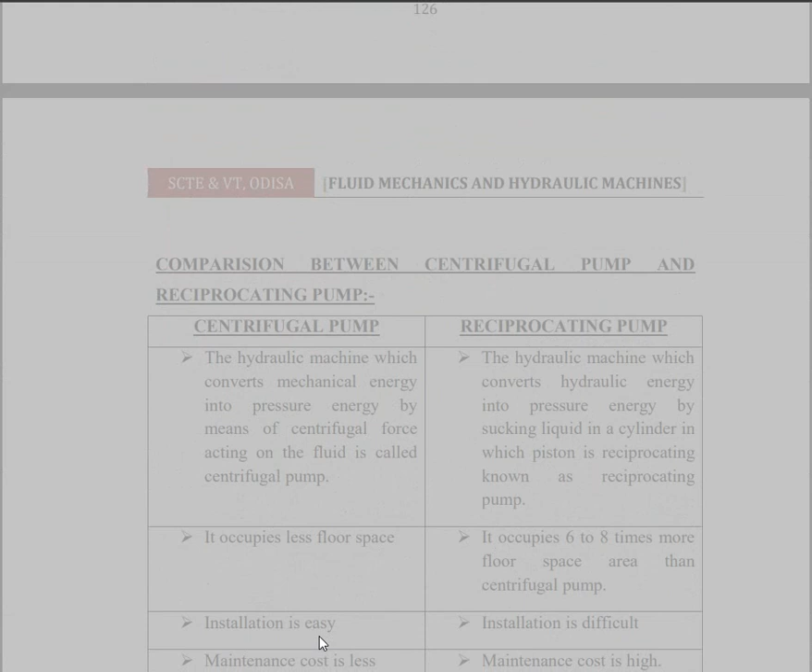Priming of a centrifugal pump is defined as the operation in which the suction pipe, casing of the pump, and a portion of the delivery pipe up to the delivery valve are completely filled up from an outside source with the liquid to be raised by the pump before starting the pump. Thus air from these parts of the pump is removed and these parts are filled with the liquid to be pumped.

The work done by the impeller equals the head generated by the pump. It is independent of the density.

So when the pump is running in air, the head generated is in terms of meters of air. If the pump is primed with water, the head generated is in meters of water. But as the density of air is very low, the generated head of air in terms of equivalent meters of water head is negligible, and hence the water may not be sucked by the pump.

To avoid this difficulty, priming is necessary.

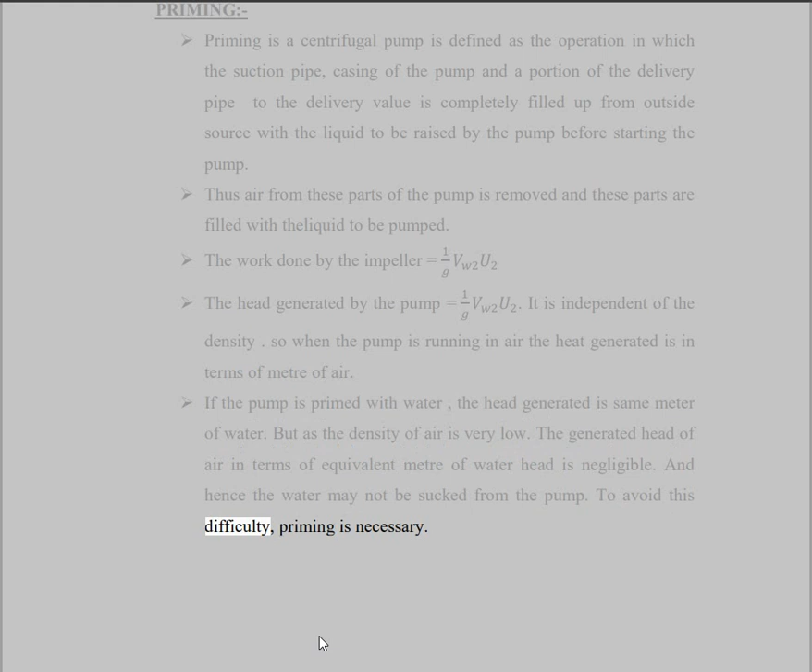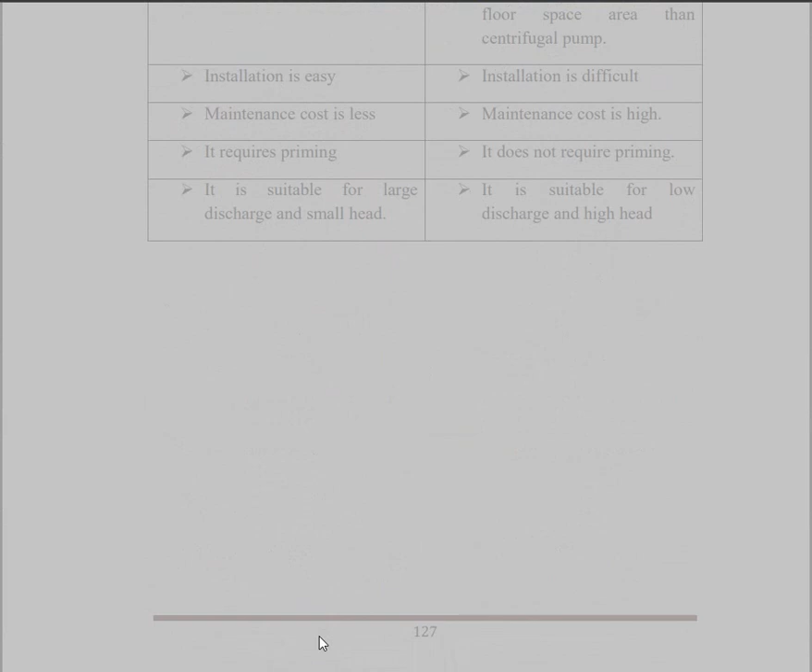127. Comparison between centrifugal pump and reciprocating pump.

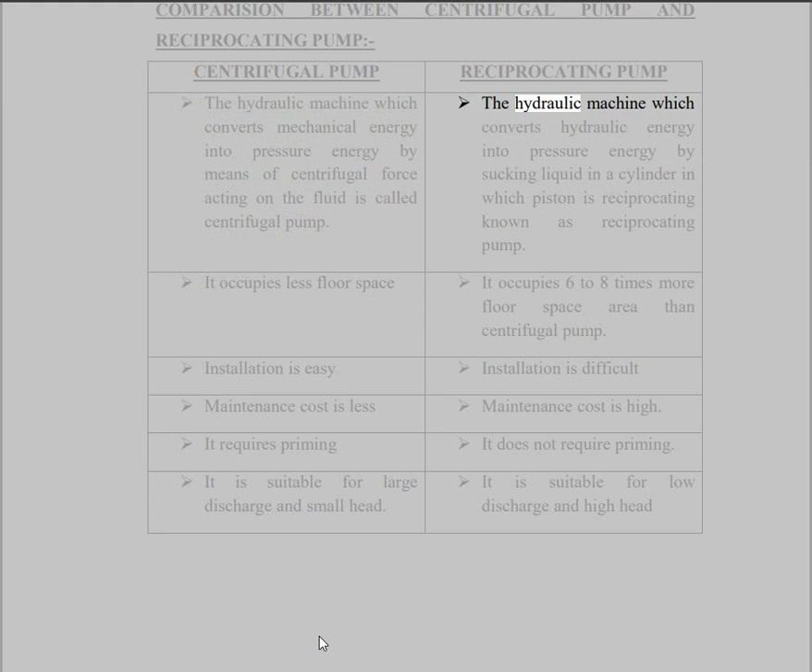The hydraulic machine which converts mechanical energy into pressure energy by means of centrifugal force acting on the fluid is called a centrifugal pump. The hydraulic machine which converts mechanical energy into pressure energy by sucking liquid into a cylinder in which a piston is reciprocating is known as a reciprocating pump.

The centrifugal pump occupies less floor space, while the reciprocating pump occupies 6 to 8 times more floor space area than the centrifugal pump.

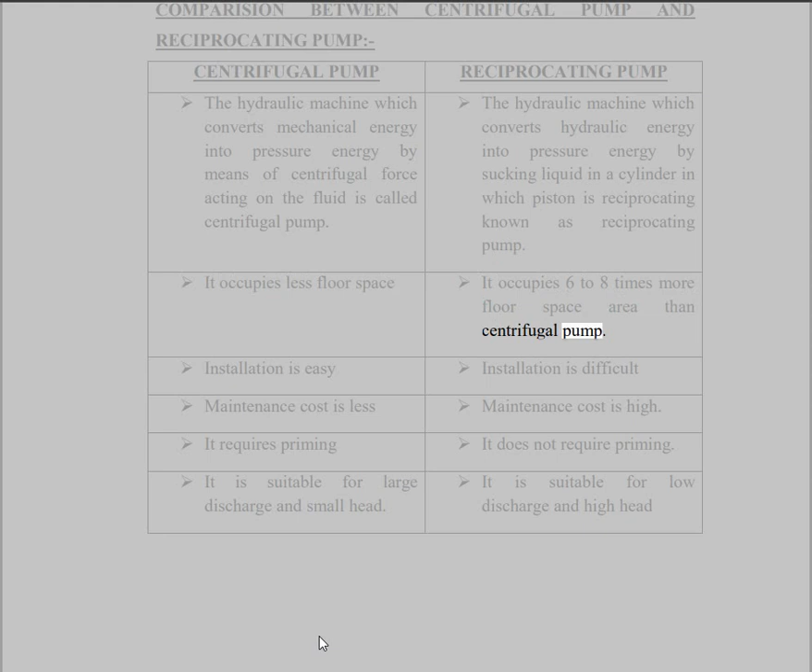Installation of the centrifugal pump is easy, while installation of the reciprocating pump is difficult. Maintenance cost of the centrifugal pump is less, while that of the reciprocating pump is high. The centrifugal pump requires priming, while the reciprocating pump does not require priming.

The centrifugal pump is suitable for large discharge and small head, while the reciprocating pump is suitable for low discharge and high head.